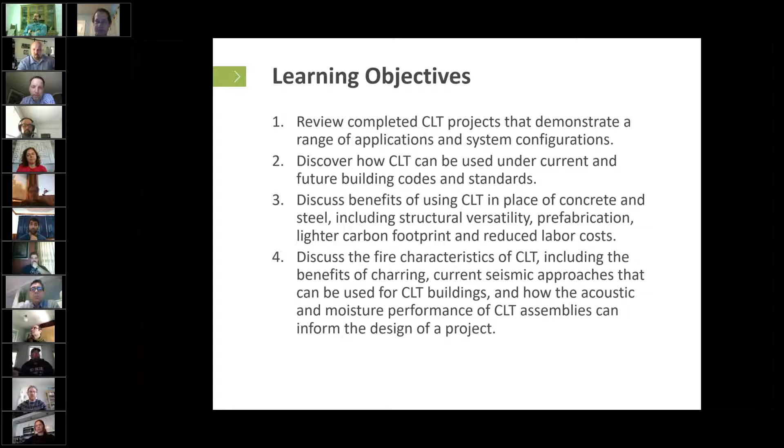So let's jump into our quick outline here. What is cross-laminated timber? But first, backing up, what is mass timber? It's kind of a newer term, really an industry term—you won't find it in the building code until the 2021 IBC. It's similar to traditional heavy timber, except it's smaller dimensional pieces of wood put together to form larger pieces. Here you're seeing two different types of mass timber: glulams, and that floor decking which is actually nail laminated timber. In the code, that's called mechanically laminated timber, which has been in the code for quite some time—used for about 100 years.

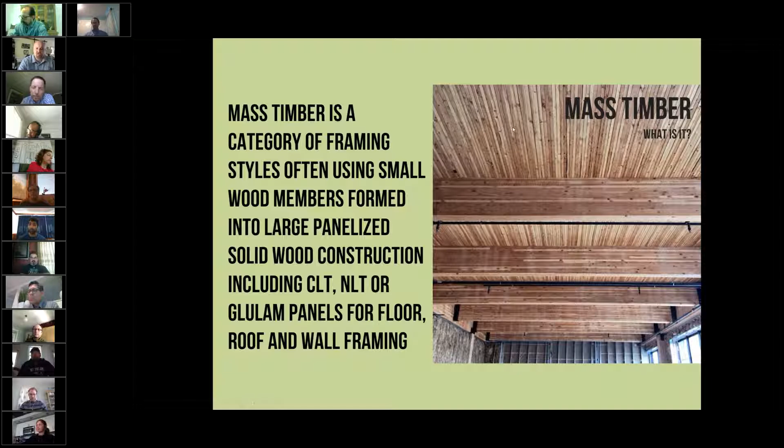Looking at the appeal of mass timber, the primary one far and away is innovation and aesthetics. Most architects come to me because they want to expose the wood, whether it's an office space, which is really common, or university spaces. But that really is the biggest driver.

Construction speed is something that's often overlooked. You save about 25% on your construction time. It's really becoming more popular in an urban setting, so there are a few now in downtown Boston, smaller applications, not very large projects yet.

In New York City, this is about to be put into the code at some point this year, though the current situation may have delayed their code cycle. In New York City, for example, and hopefully Boston too because of high labor costs, there have only been 4 projects that went forward until the fire department and building department put a stop to it because it wasn't specifically in their code.

We're talking about CLT here. Those 4 projects actually came in below a steel frame project because of high labor costs and construction speed. That's not the normal case. It's ironic that New York City consistently comes in lower cost but you can't use it yet. Hopefully that also translates once we see a few mass timber projects in Boston.

Some secondary drivers: it's lightweight. Compared to a concrete building, it's quite a bit lighter. We've seen architects take advantage of this when adding stories to an existing brick building. I'm helping with a couple in New Haven where they were able to get an additional story than they would have otherwise, due to the foundations beneath it, by using mass timber instead of laying brick or masonry and going with a heavier concrete system.

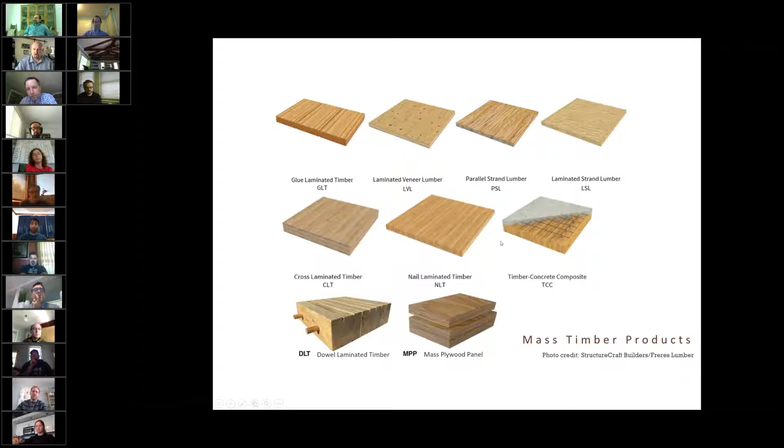So what is cross-laminated timber? It's large wood panels, anywhere between 8 to as much as 64 feet long, made of boards planed down to about 1 3/8 inches, depending on the manufacturer, so they're nice and straight. They lay them perpendicular on glue layers, forming larger panels similar to precast concrete, except lighter, better looking, and more environmentally friendly.

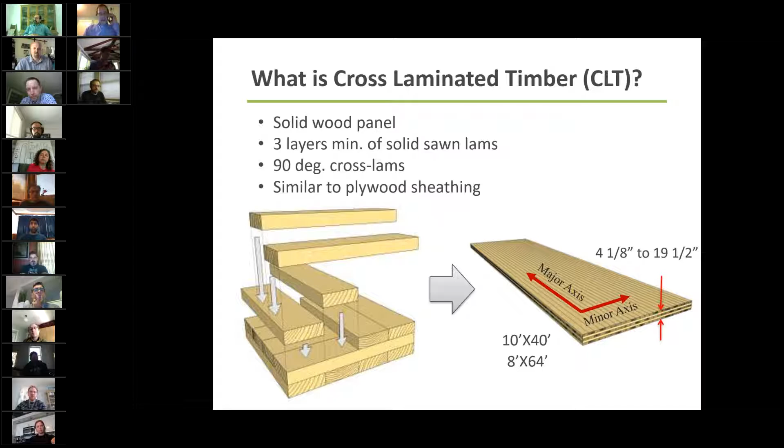Here's a cross section of it. Usually when I do these presentations in person, I bring a CLT or NLT sample, but this is basically a cross section showing an odd number of layers, oriented at 90 degrees to each other.

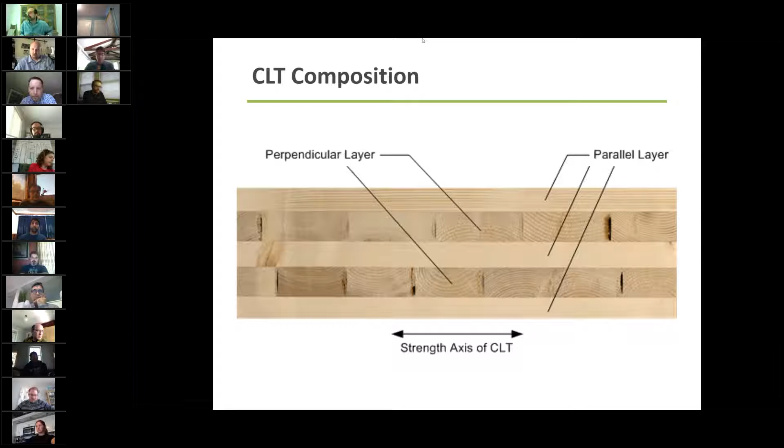It is finger jointed together, so really what that means is, in theory, these could be infinitely long. So really the only limit that you have is shipping. So what can fit in a container?

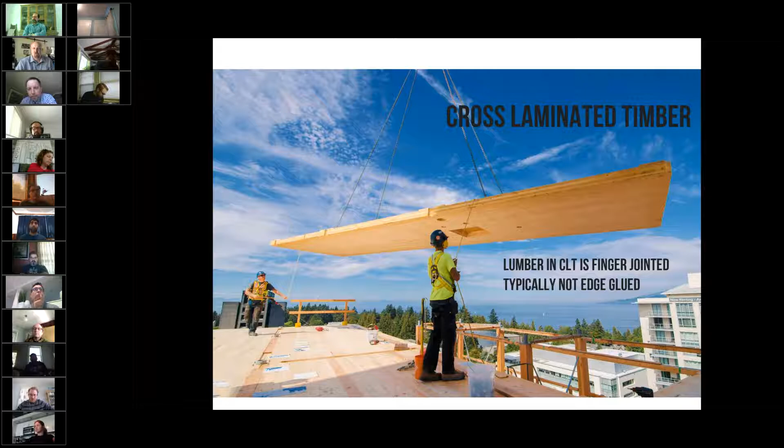Some of these products are shipped from Europe. So what can fit in a shipping container, or if it's more local in the United States or North America, what can fit on a truck as you're trucking it either from the Pacific Northwest or from a plant down south from us, or Nordic, which is the closest to us, north of Montreal.

Your different layups, as you go through the design of a mass timber building, you really want to optimize it. You really want to stay away from 7 and 9 plies. I rarely see a 7-ply go forward. I've seen a 9-ply on one project only.

Really for floors, you want to start with a 5-ply or even a 3-ply, depending on your fire rating requirements. A 5-ply is almost always going to get you over an hour fire rating. 3-ply we've seen on projects where it's 3B construction, where you don't have a fire rating requirement, or 5B construction. If it does require a fire rating, usually you have to shorten your spans a little bit, just to account for the char rate, which I'll get to in a second, which is one of the big topics of exposed timber.

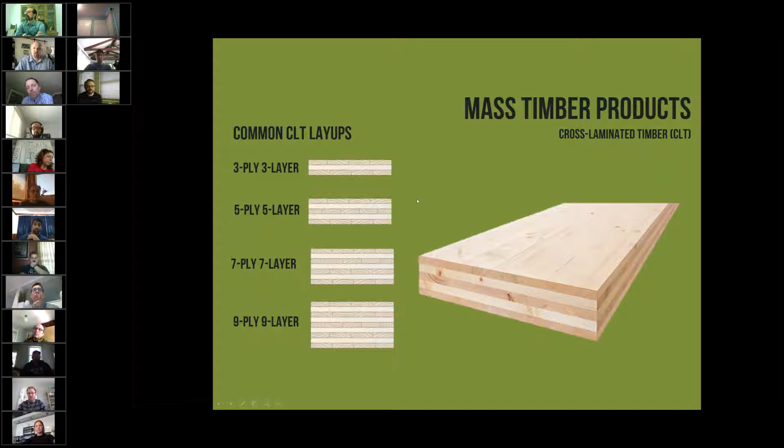This is how it comes together if you're going to use it as walls, although walls are rarely used in CLT. Usually it's a post and beam system due to cost concerns, but also because oftentimes the walls are covered up anyway. So if you're going to use all that wood and cover it up, it doesn't make a whole lot of sense. There are a few projects that do expose walls, but usually that's the driver. If you're going to expose the walls, you can use mass timber. If not, you use something else.

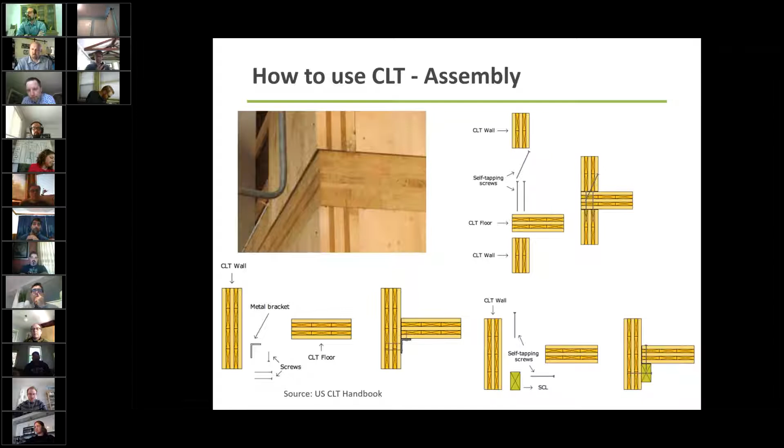So embodied carbon, as I said, that's a big one for state projects and university projects. In the Northeast, there's maybe 15 or a little more projects that are looking at using mass timber for this reason. Some of them have already gone forward.

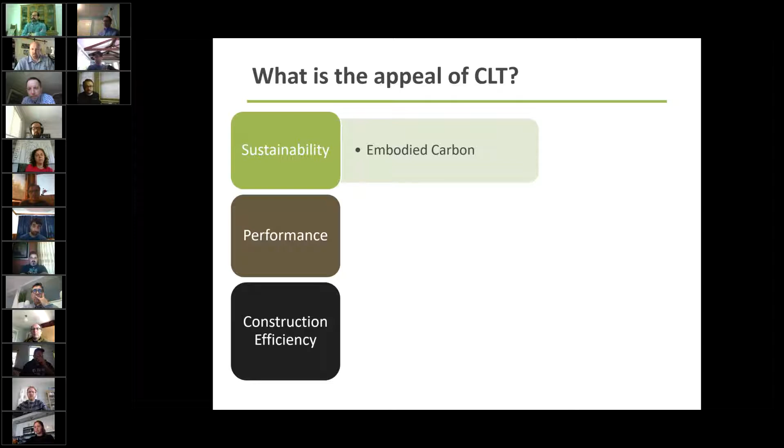We do have a carbon calculator on our website, so if you ever want to compare what the savings are from using even light frame, but also mass timber, which sequesters more carbon, what's the comparison? That's basically what this is, and we convert it so it's easy to understand, to vehicle operation and home operation, just because metric tons of carbon isn't something I can fully wrap my brain around.

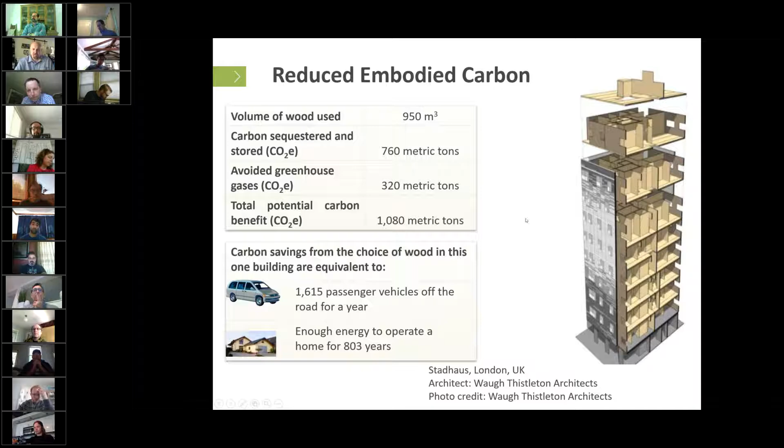That's a free calculator on our website. I'm sure you've heard of this project here, but there's a good story behind this one.

They called up my colleague up in the Pacific Northwest. This was years back, and he ran in there and gave them all the carbon metrics, some of the data behind it. Before you know it, they said, well, we're flipping this thing to wood. It's going to make it easier.

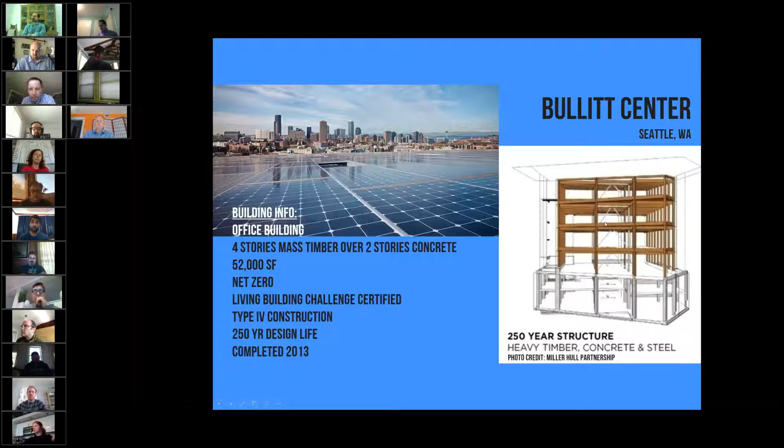And so even though it looks like steel, here's kind of the metrics of the building. Post and beam system, they actually used nail laminated timber. At the time this building went forward, cross laminated timber wasn't really used a whole lot in North America, so they used a different product, nail lam, for this one.

And that's kind of the look that we see a lot of architects and owners going for. The owners are actually able to, in the end, it's not guaranteed, but they typically are able to sell or rent their units out at a faster rate, and also at a little bit higher percentage as well, just because of the exposed look.

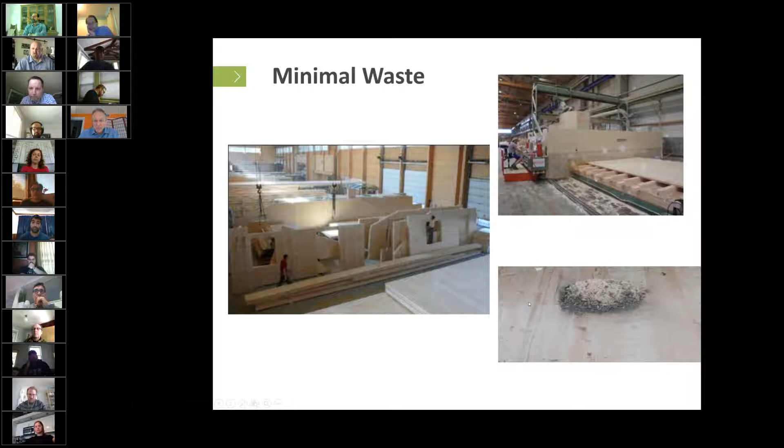There's very minimal waste, so these panels are very efficient. These panels are manufactured in the plant - there's just going to be a bunch of sawdust in the end. You can see you're able to cut openings for windows, or floor openings for mechanical. The image on the right is a project in the Pacific Northwest, on site after they did an entire story. This was basically all the dust they gathered - the waste for an entire week of work that you could just pick up with your hand.

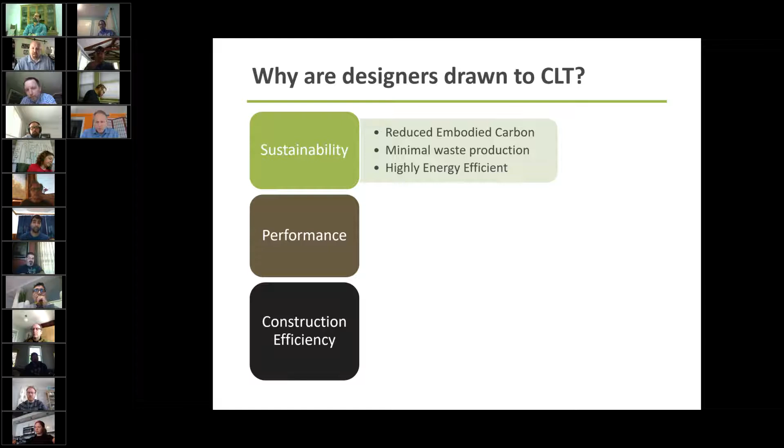Energy operation is really highly energy efficient, particularly if you're using mass timber, usually CLT, in an exterior envelope. Passive house designers are really interested in using CLT for their envelope because it gives you a thermal property, about 1.25 R-value per inch. But more importantly, it gives you a really tight building envelope that you just couldn't get out of a wood building previously. So it's advantageous particularly for passive house designers.

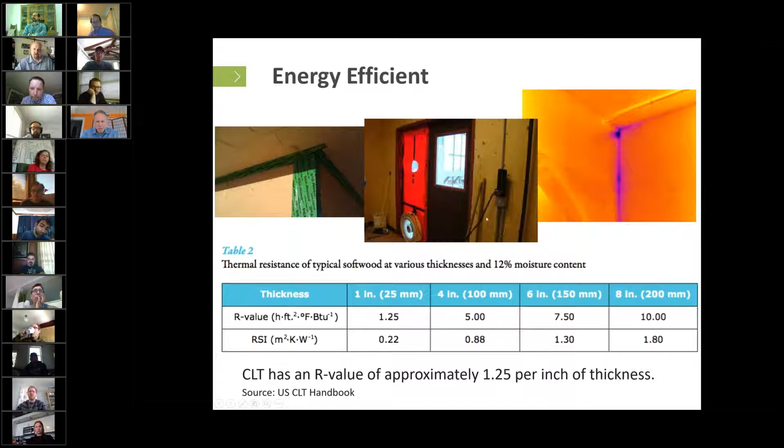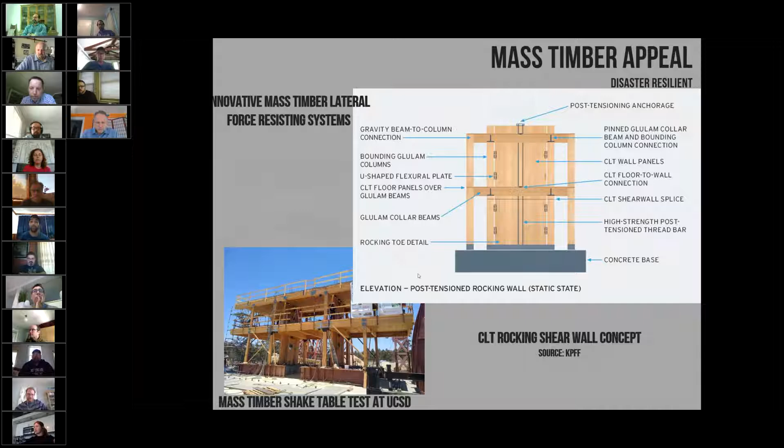And if you do any government buildings, this has also been tested for blast. This was spearheaded from us as a request from the federal government, where they wanted to potentially use wood on projects that had blast resistance.

I've done a number of blast designs out on the West Coast, where I primarily practiced, and the Navy was one of our big clients there. We never used wood - it just wasn't even a possibility. It was typically concrete or masonry. I did one steel blast design, which was a nightmare. Any type of post and beam system is a poor system for blast, because if you pull a column out, you're going to get partial or full collapse. But anyhow, long story short, this was tested for blast.

It's now being used on a few projects on military bases that require blast testing or blast resistance design. This was the first one, done by Lend-Lease, in Alabama - a 4-story Candlewood Suites.

It doesn't look like a timber building - it's all clad in brick. And there it is under construction. Kind of the shame of this building is even on the interior, it doesn't look like a wood building. They covered up 100% of the timber. I think that had more to do with legal issues, where all the Candlewood Suites have to look identical, so they covered everything up, unfortunately.

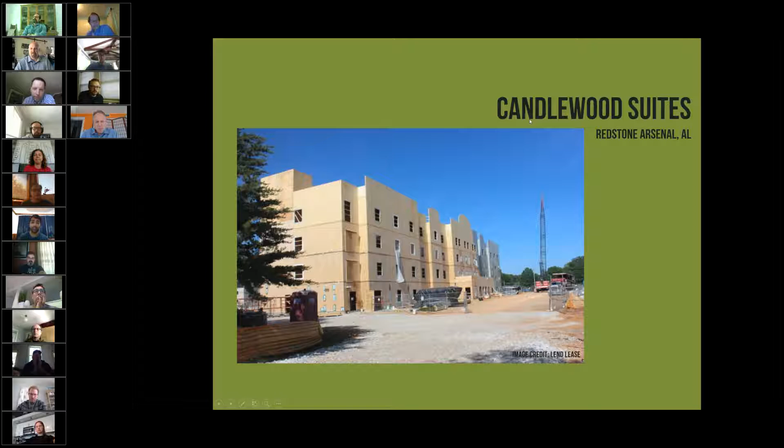I think they may have taken that a little too far, but just some metrics - not that large of a building, 60,000 square feet or so. This one again used CLT in the exterior walls for that blast resistance, that was the whole purpose of it. Lend-Lease is now on their 3rd hotel. Fort Drum, I think there's going to be 2 of them, a little bit closer to us.

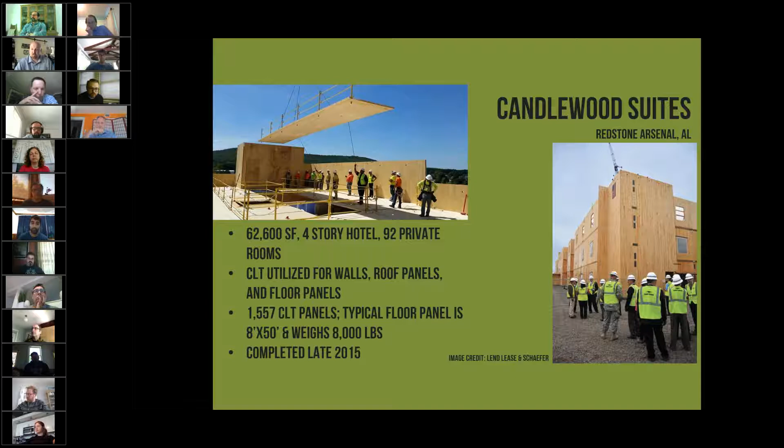Jumping into fire resistance - this is typically the number one topic for timber design, whether it's light framing or mass timber. There are 2 different ways you can go about fire resistance, with exposed wood or even wood encapsulated with gypboard. There are a ton of fire tests - on the left there's just one of many. We have an inventory on our website, under solution papers or something like that, about 4 tabs over. Click down and you'll find a whole host of tests.

Now that actually isn't a code requirement, that's just one way. The IBC actually references the 2015 NDS. Currently, if you're in the 2015 IBC, that's the code path. In chapter 16 of the NDS, the design specification for wood, that's our wood code. Chapter 16 goes through how to achieve up to a 2-hour fire rating with exposed timber, and it's very easy to do - about 3 pages or so of code writing.

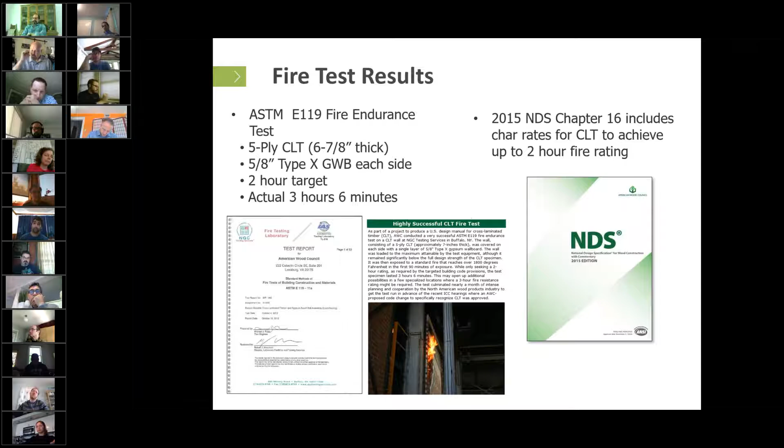The general idea is we understand how timber performs in a fire - it chars at a very predictable rate. Understanding that, we know exactly how much we're going to lose during a really heavy, intense fire. As long as you have enough structure behind that, the char layer insulates the wood, then you're code compliant at that point. This was first included here in 2015, in the IBC.

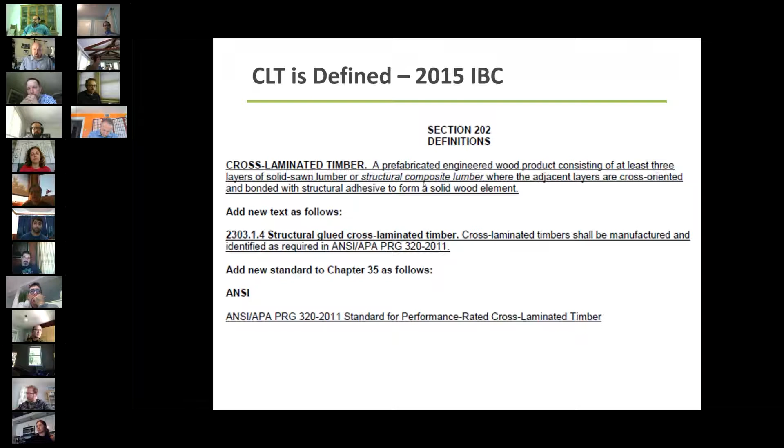Beyond getting the fire ratings, this is actually one of the items that I typically help architects with on mass timber projects: how to classify your building if you're going to do mass timber. Most architects jump right to type 4 and say, hey, I want to do a type 4 building.

The drawback to that is you can't have any concealed spaces unless you get a variance currently. That is changing, but currently if you do a type 4 and you're 100% code compliant, you couldn't have any concealed spaces. This is really modeled on our mill buildings here in New England, brick exterior with interior heavy timber members. You do have the opportunity to use mass timber and heavy timber in types 4, 5, and 3 construction. The advantage of both 5 and 3 is you can have concealed spaces in both of them.

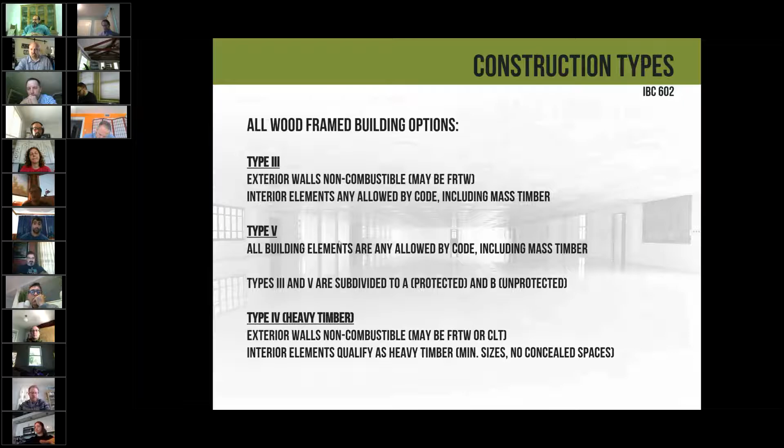Looking at performance of wood, this is a Glulam E119 test. Both beams were unprotected, so there was no gypboard, no fire spray on. You can see when the steel beam buckled, the Glulam actually had about 75% of its strength. So we understand that it performs well in a fire.

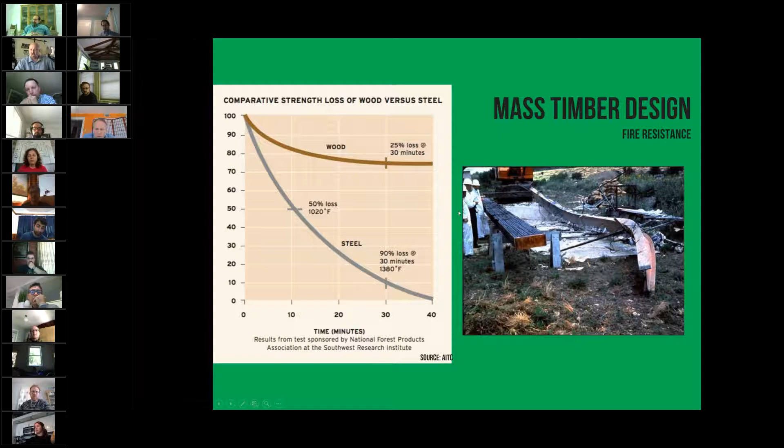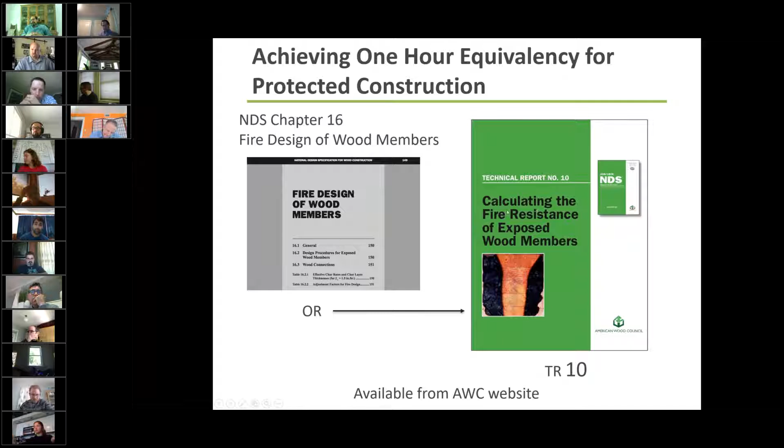This slide was a little out of place, probably should have been two up. This is the code path of the fire resistance I mentioned before. TR10 is a document done by our partner organization, AWC, which goes through calculating the fire resistance. It's a little bit long of a document, but it's there.

Now jumping back to construction types. If you're going to do a building in type 4, this is basically what it is: exterior walls are all non-combustible, or you can use fire retardant treated wood. Cross-laminated timber does not currently come in fire retardant treated wood, but you are permitted to use it in the exterior walls if you add a layer of FRT plywood or a non-combustible layer to the exterior side. You can't have any concealed spaces on the interior, but the advantage of type 4 is the exterior walls where you can use CLT if you want.

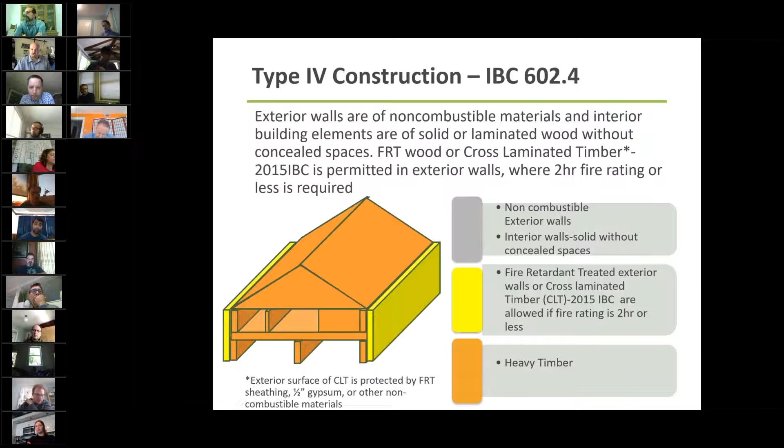You also don't have to calculate fire ratings on the interior. You basically design structurally what you need, and then just check a table in the IBC to make sure you have minimum thicknesses and widths of members for floor beams, floors, roof beams, columns, and roof decking. If you meet or exceed those sizes, you've met the code in terms of fire. The code just understands that heavy and mass timber performs well in a fire, and it's looking at minimum sizes. Most timber structural engineers will still go back and check that, even though it's not required per code. It's just the more experienced ones making sure they have that hour.

This was the concealed spaces issue I've been harping on, where you're not permitted to have it in type 4. This is a huge one architecturally. You can't hide mechanical items, electrical, anything - everything is 100% exposed, provided they don't get a variance.

So there are projects that did get a variance. UMass Design Building is one where they basically had concealed spaces just in certain locations. What they did is they brought sprinklers into the concealed space. Now, technically, that's not in the prescriptive code, but they were able to get a variance for that, and that's the way they went. They could have classified their building as type 3 instead. They just didn't come to me early enough - the whole problem would have gone away.

So what do we do if we don't want to do a type 4 building? We want to have concealed spaces. The easiest thing is if you can do it in types 5B or 3B construction, then you wouldn't have a fire rating requirement for roofs at all. You can have spaces, you're good to go.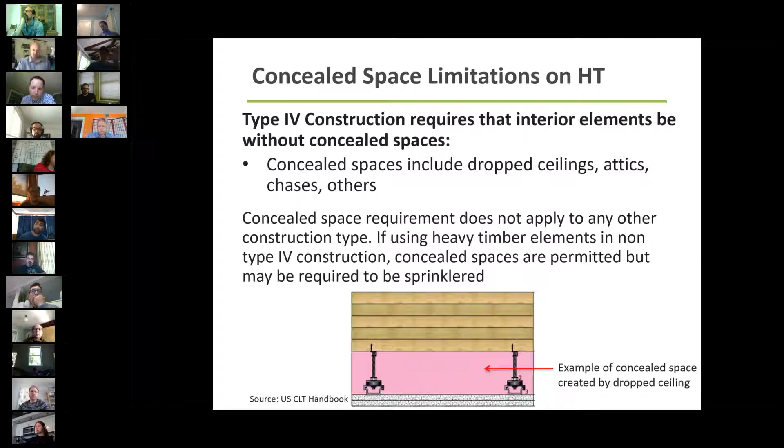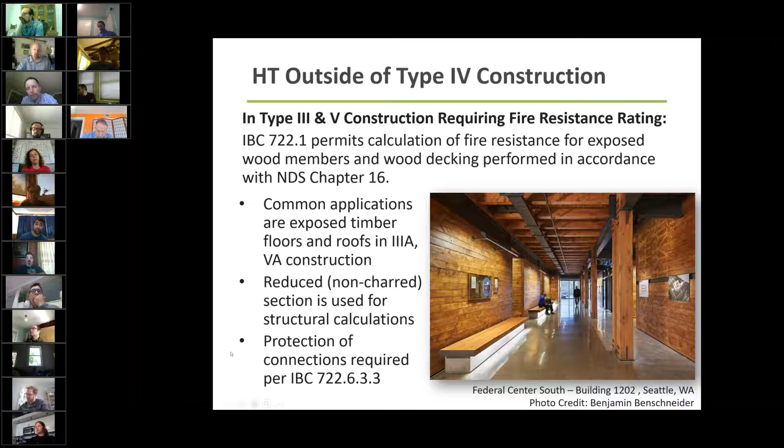Now, what if those construction types don't work due to number of stories or allowable area? You can also do it in types 3A or 5A with concealed spaces, and you simply have to calculate the fire resistance that the timber provides, which is really easy to do, or show testing that it meets and exceeds it. The only disadvantage of type 3A construction is if you want to use CLT in the exterior walls - it is permitted in type 4, but not permitted in type 3 currently, which makes no sense in my mind, but that's what the code is. In type 5, you can use CLT or mass timber anywhere.

So let's jump into acoustics. We have to typically look at acoustics a little bit differently for a mass timber building, because for the most part, we want to expose the undersides of the floors and the roofs. Now, if you don't expose the underside and you have the ability for a drop ceiling, acoustics becomes pretty easy. But 99% of the time, it's not covered up, so we usually have to do something else.

As you can see here, the challenge for STC and IIC is really IIC. So your footfall is only getting you about halfway there from the bare panels. Now, we don't have access to the underside, so we have to do something up above.

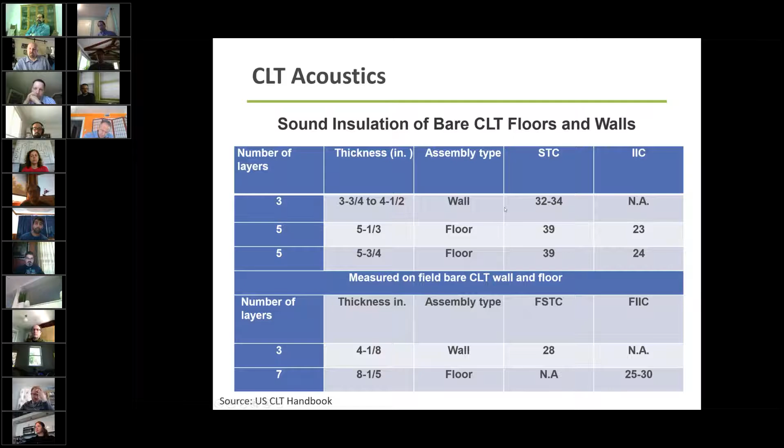This is kind of a common layup, or assembly, that we see. The black element here is typically an Acoustimat, and there's a few companies that make that. Then either an inch and a half or 3 inches of gypcrete or concrete topping, and then whatever flooring you have. When you do all of that, you get an IIC above 50.

Now, AcoustiTECH, the other one is Maxxon. They both have some pretty good interactive tools on their website. So if you're looking at a mass timber building with acoustics, I definitely recommend jumping on their sites. We also have an acoustical paper, or inventory, on our website as well.

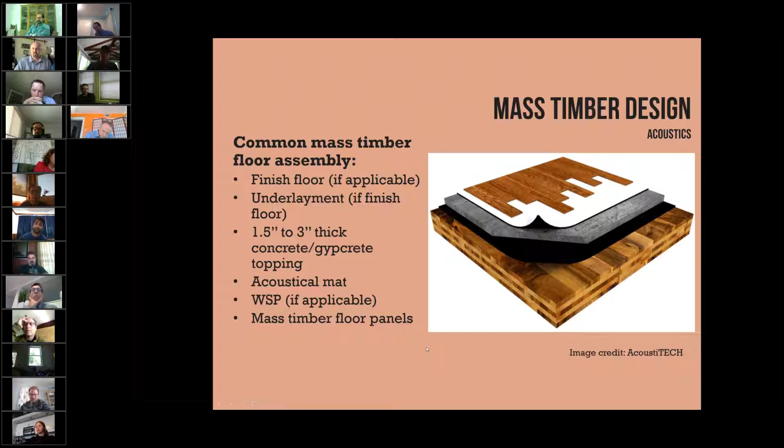So the flexibility of this material really has given us more options where we can use wood, which we typically wouldn't in the past. The project on the left is in Massachusetts that I assisted with. It's a light frame building, and they just didn't want to wait for the masons to put up the shafts. They wanted to get moving quickly. They heard about cross-laminated timber and called me.

I gave them the fire data that I just showed you guys, and a little bit more. Before you know it, they went with the CLT shafts. They got these both up—this is a contractor who had never touched the material before. Now, they probably have touched cast concrete panels, but they got these two shafts up in about 4 hours, and the next day they ran out light framing, as opposed to course per course for masonry, where you have to wait for it to cure, all that fun stuff.

You do get flat plated systems if you want them—that's the two middle images, the bottom and top middle that you're seeing. That's more uncommon to do, but it is possible. On the right, this is the timber composites I was talking about before, where you're connecting the concrete topping to the wood, so it acts similar to a steel beam with studs connecting metal deck and concrete topping. It really stiffens it up.

But this is a project at the University of British Columbia, kind of their signature piece of the building, and they didn't drop columns in here. These are fully cantilevered, wood and concrete composite stairs.

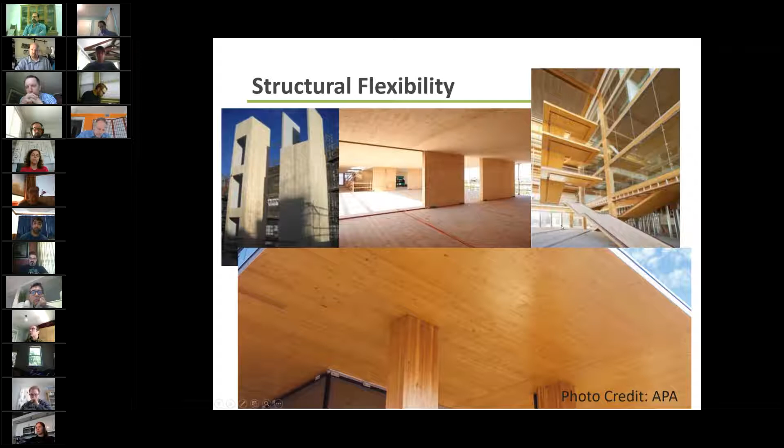So structural flexibility—it is quite a bit lighter. If you're comparing it to a concrete building, it is significantly lighter. Concrete reinforced is about 150 pounds per cubic foot, wood is about 35 pounds per cubic foot. So it is quite a bit lighter.

Because of that, if you're comparing it to like a precast down on the left—if it was precast concrete, it's a lot easier to work with. Your crane size is going to be smaller, your crew size is going to be smaller. It's a safer job site because it is that much lighter.

And some things that oftentimes I didn't even think about myself is it really is a silent job site. As you walk by these—I've been to a number of them now—the only thing you hear usually is a drill, and that's pretty much it. It's honestly like a ghost construction site compared to what we're used to. And because the crews are so small, there isn't a whole lot of yelling, which is common as well.

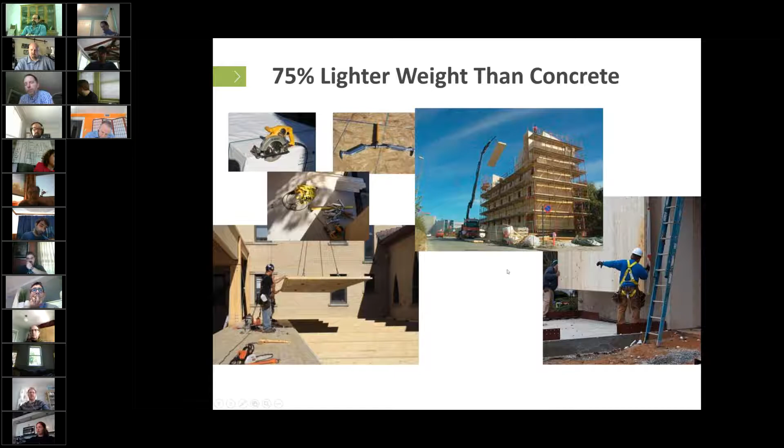Reduced construction time. Generally, you're going to get about a 25% reduction, as much as 30%, depending on building size, in your construction time, and that's the erection of the structure.

This particular project in the bottom left—the one up top is from Europe, so I'll focus on the one from the United States. This was the first elementary school that used mass timber in the United States, and it took them, after they were out of the ground, 8 weeks to construct. That was again with a contractor framer that had no experience with cross-laminated timber.

Really, anyone who's done precast can do cross-laminated timber. It's the same thing.

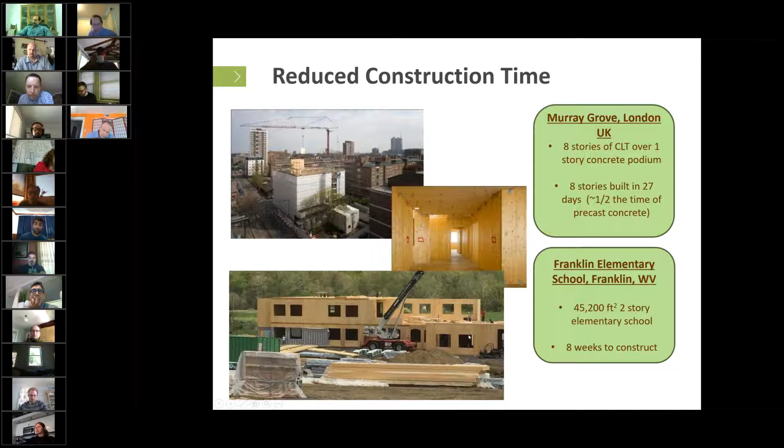There's just a shot of it. You can see it. Again, it doesn't look like a wood building.

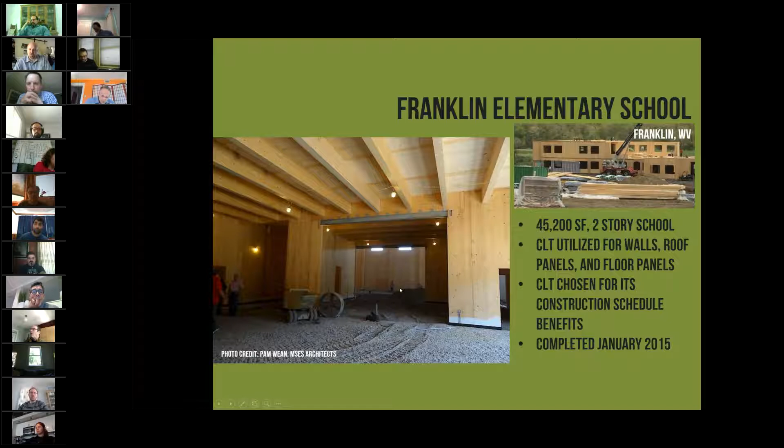It's clad in brick, because they use a lot of brick for their schools down there. On the interior, you can see it's all mass timber, so they did use it for the walls on this project as well. There's their gymnasium, where they exposed some of it, and they have their Acoustamats in the gym.

Visually, you kind of have to cover up some of the wood here. If you didn't, it would look like a barn or a ski lodge or something like that.

It is prefabricated, very precise. This is an image I've already shown, but once you select a manufacturer, you're going to send them a set of plans. Similar to steel, you'll be getting a set of shop drawings. They help you a little bit with layout of the panels, and can sometimes do it more efficiently. So there's that whole shop drawing phase. What we typically hear currently is about 10 to 16 weeks from the time they receive plans to the time you can get panels delivered to the site, so you want to take into account a few months for that whole process.

If you use Glulam, you get quite a bit.

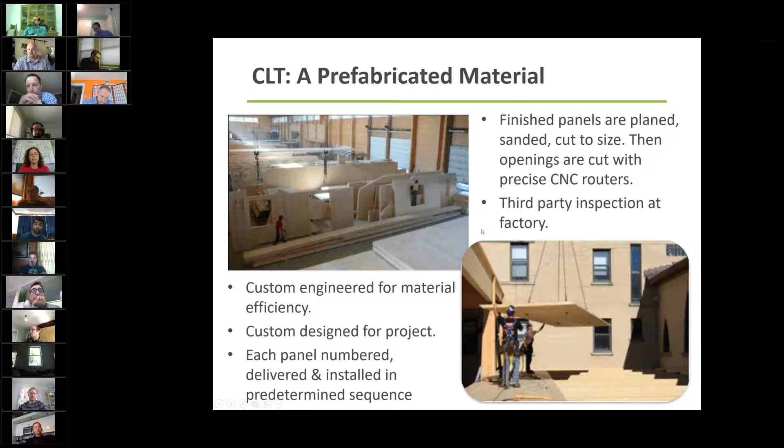Looking at the timeline, it started over 20 years ago, a little more than that actually, and sometime in the mid to late 2000s the interest in North America began. Canada jumped ahead by a few years and got their handbook done in 2011. We were a couple years behind, but pretty quickly we got it into the code. The AWC got this into the 2015 IBC, which was pretty impressive—getting a new material into a code with that speed is really tough to do. The reason they were able to do it, and the reason there are so many fire tests, is that very reason: to get it in the code. So nothing has really been tested more for fire, to my knowledge, than cross-laminated timber. There's just so many tests of it.

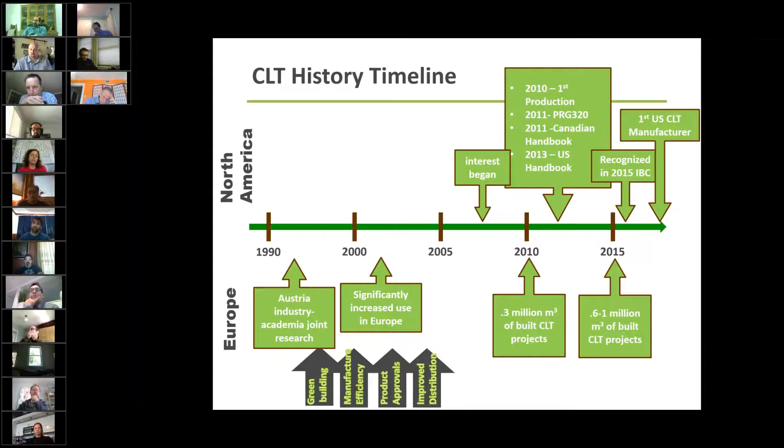So is it readily available? It definitely is. Nordic, up north of Montreal, is in Chibougamau—they have a whole forest there that they source sustainably. They're the closest one to us.

There have been a few expansions—two more that just jumped on the map here, Guardian and Element 5. They're producing CLT more for crane mats, not for buildings, and of course those aren't certified for building use. That would be an alternate methods path, which most folks don't want to go down.

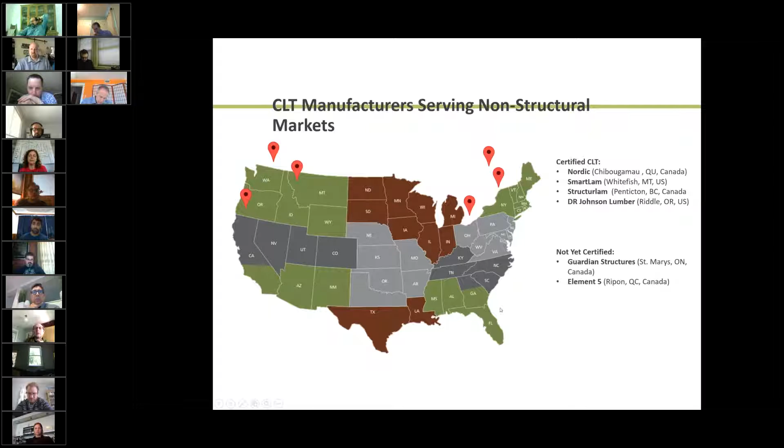Looking at International Beam, down in Alabama—that plant actually just recently got bought out by SmartLam, so that's actually SmartLam now, not International Beam. This slide is a little older. They're up and running, and they use southern yellow pine down there, which is a very strong wood, comparable to Douglas fir, and also black spruce, which is what Nordic uses.

Who else is on here? Katerra is another one—they opened up in Spokane, Washington. Even since then, things changed so quickly. Vaagen is another one in Washington who is also certified. So they're starting to pop up more and more.

The one in Maine—there was another firm that came in but never really got going. They put everything into Alabama instead and basically abandoned Maine for now, though they may come back to it a little later on. So we don't really have one here in New England yet, but hopefully we'll get one soon.

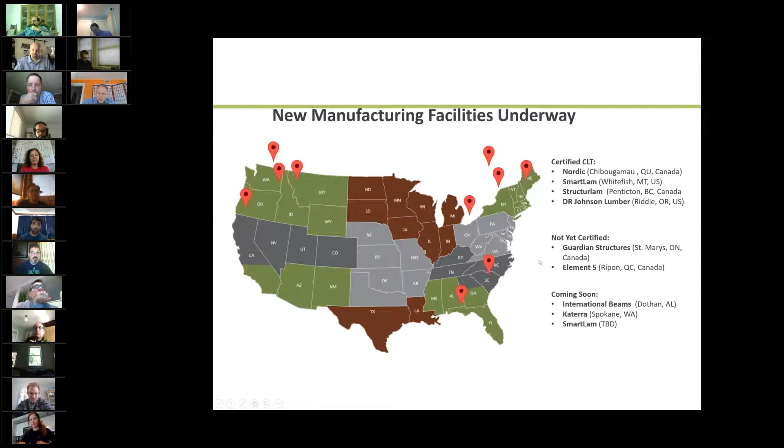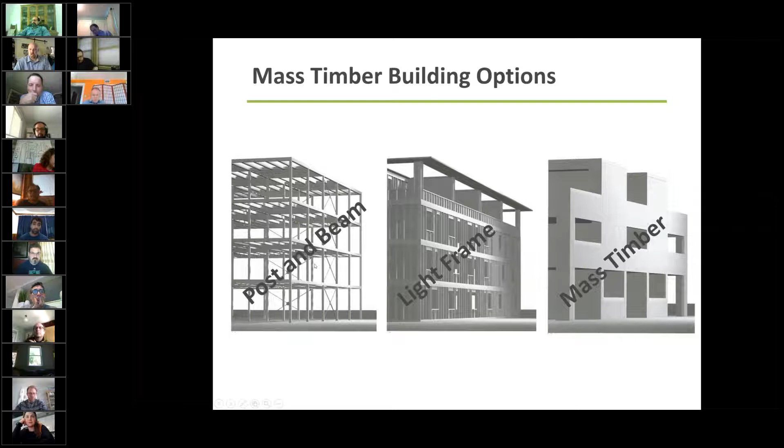Just looking at some project examples: you can do a post and beam system, a hybrid light-framed approach where you cover up the light framing and bring in CLT floor and roof plates, or a full mass timber building like we've seen. The post and beam is far and away the most common, mostly due to economics and also showing the wood off from the exterior at street level. This was a small project that was originally going to be masonry, and they switched it to CLT just to save on really poor foundations.

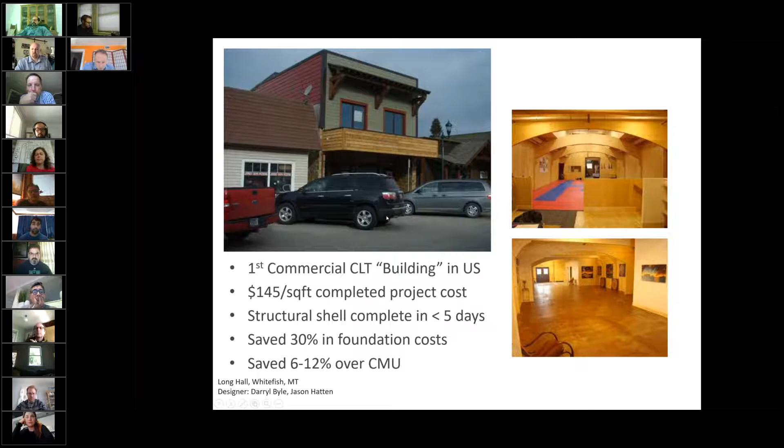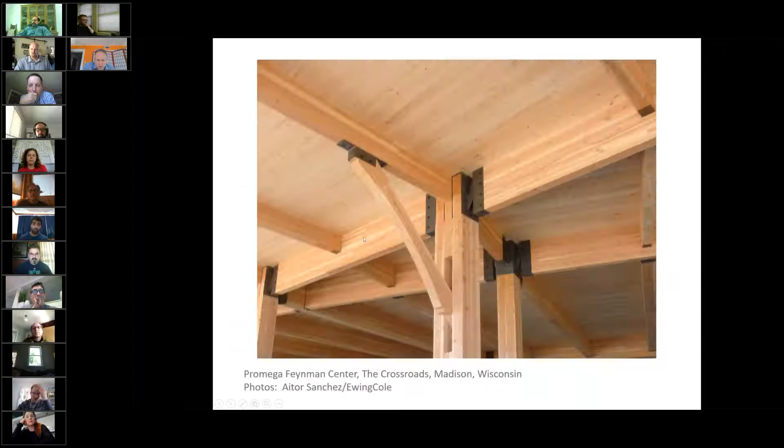This was the one that also had the thermal test I showed earlier in the presentation. It was the first project that used North American cross-laminated timber, and they did it in the roof only—a post and beam system, very common, with CLT only for the roof plates. It has a really nice look to it. That photo was taken during construction.

This is just showing one of these large panels and how efficient it is. You're dropping it down, then someone comes back with a gun and screws the screws right into the glulam, and just moves on to the next panel. So it's really efficient, easy to work with, and very quick.

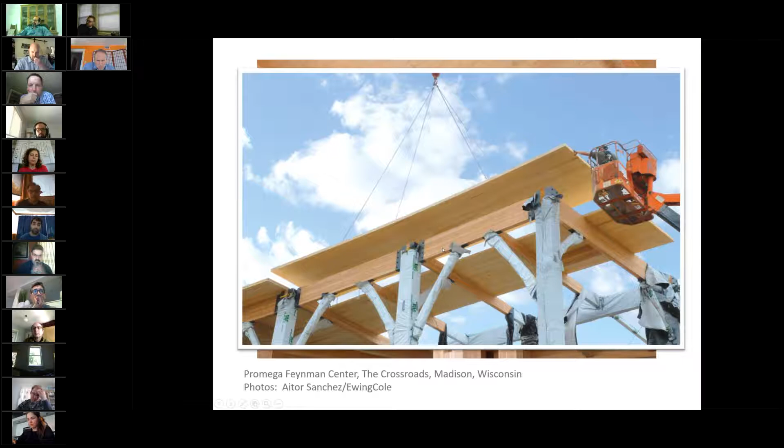And then the final product here - this is the project I showed earlier. They went with a double layer, putting them both in the strong axis in opposite directions because they didn't want any beams, so it's a flat roof plate in Chicago. This was a design competition - the goal was to do a flat wood plated system, and this was Thornton Tomasetti's design that they came up with, and they won it.

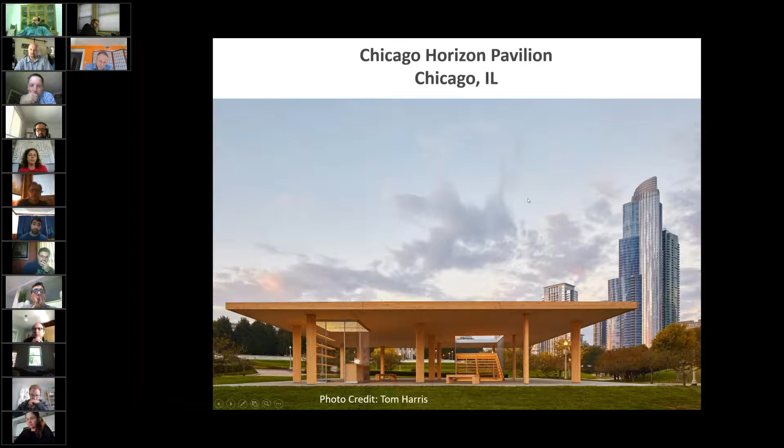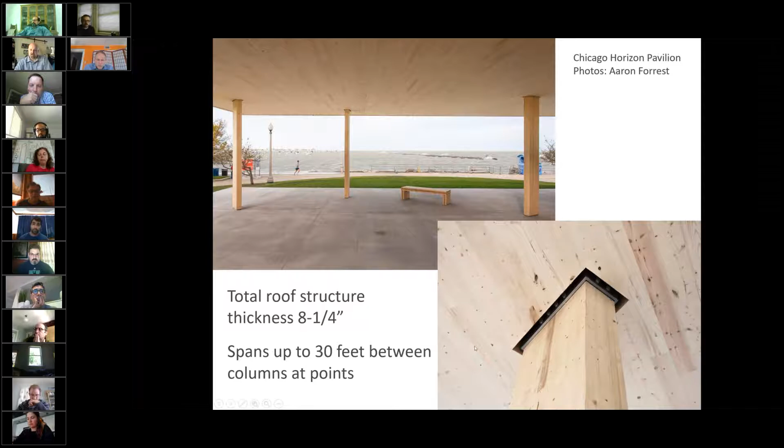So there's two layers of 3-ply, screwed together. The columns actually go up through it, connected to that upper layer, and there's a plate you're not seeing here that's screwing them all together. But it does look nice at night.

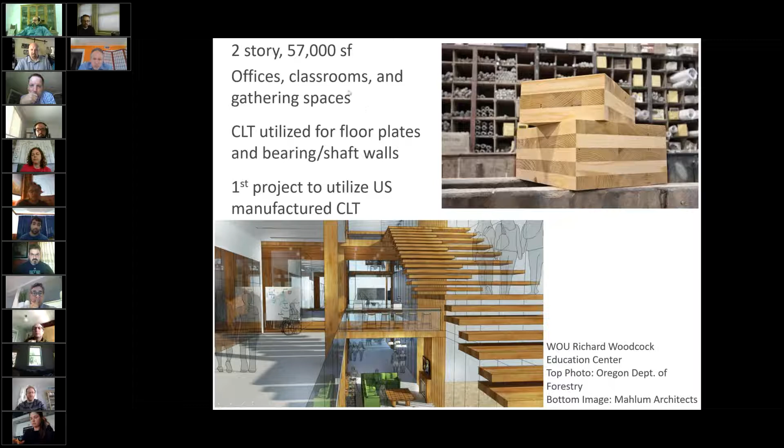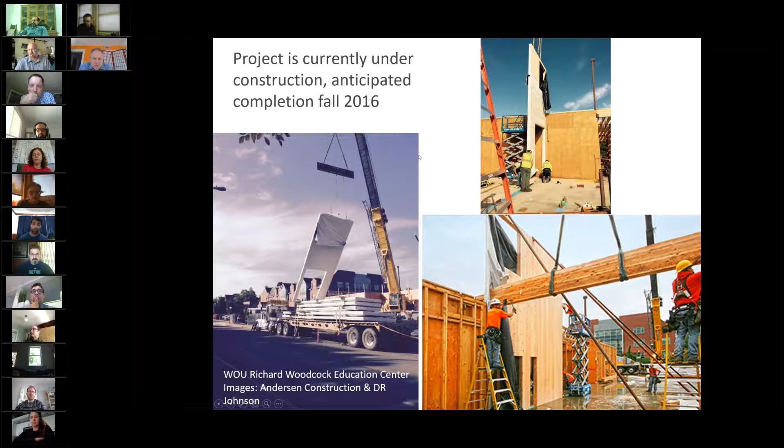This project is an older slide, it was actually already completed. This was one done by D.R. Johnson, so you can see those are Doug fir glulams, and the panels were also Doug fir as well.

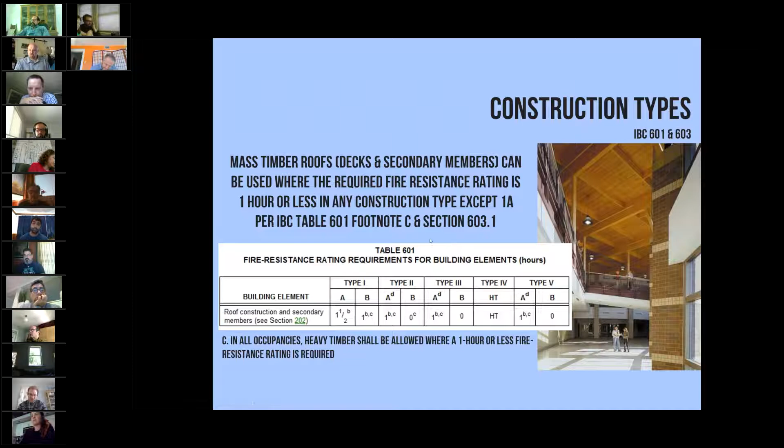Then they exposed it. A little bit closer to us here, this is the Jetport in Portland, Maine. Similarly, this is a type 1B unlimited area building, so it's all conventionally non-combustible. They utilized that footnote, and they used all heavy mass timber for elements.

This particular project used glulam, and they actually used decking on the project. This went forward in 2012 when cross-laminated timber really wasn't available, or they absolutely would have used CLT for this project. DeStafano and Chamberlain have said that to us many times - if CLT was available, it was a no-brainer, because they basically had to put every one of these pieces in one by one on the roof, which is pretty tedious as opposed to dropping a prefab panel down and moving on.

If you ever get a chance to visit this airport, I did once - just be careful about taking photos. You get TSA swarming on you pretty quickly when you do that.

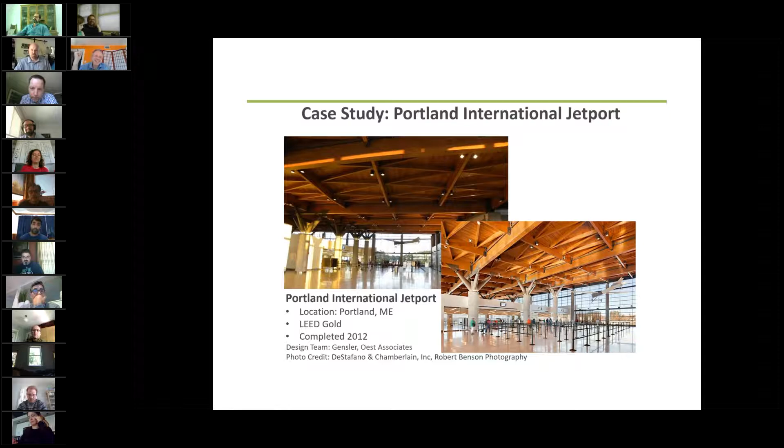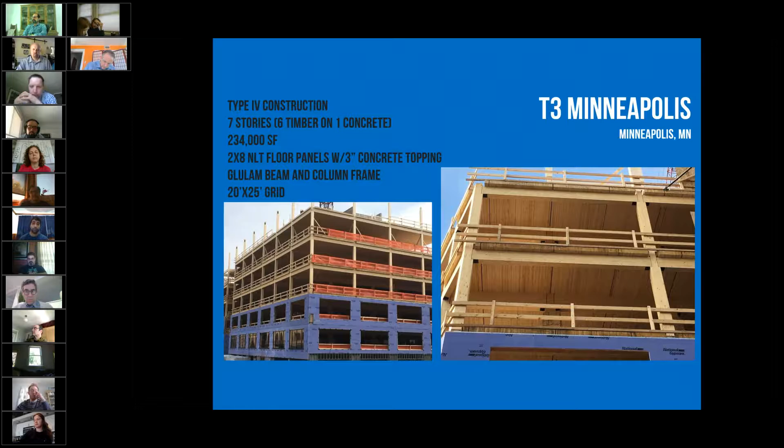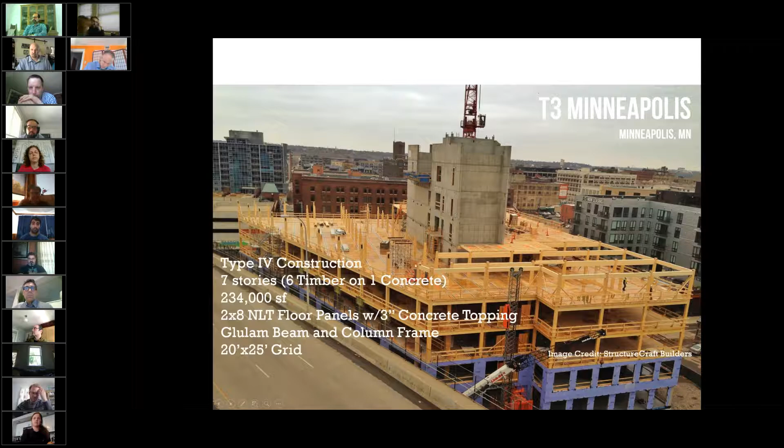Now those other projects have had their stop work order finally lifted after a long process, but this project started about 6, 7, 8 months after the first few CLT ones I helped with, and it finished far before the others due to the New York-specific issues they were having. That's only a New York City issue; outside of it, that's not the case.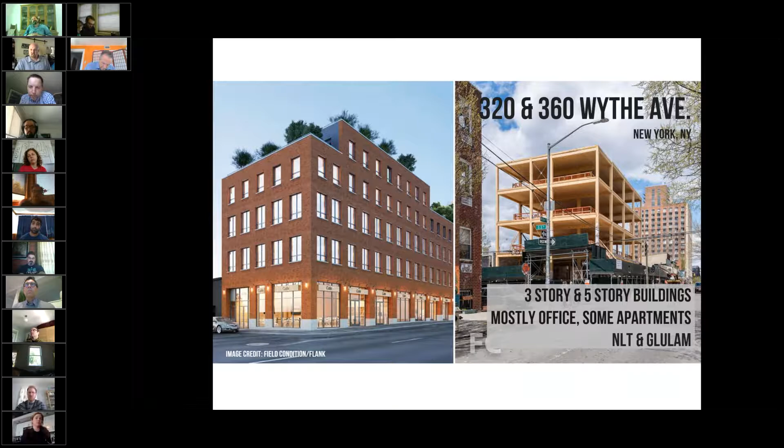I was able to visit this building. I'll have to upload images in the future. They have office spaces on the larger building on the lower floor. Looks really nice as you walk in. In fact, I brought some potential folks who are going to use CLT from the Boston area there, and their jaws drop when they walk through this room. It's really impressive. Up above, it's all residential. It's offices on the lower space only.

So jumping into the code status. The US currently, the 2015 IBC and the 2018, which Massachusetts thankfully is not going to be adopting, is based on an old Heights and Areas Act. It's really based on light framing. It's not based on fire protection systems we have today, design, fire engineering that we have that wasn't available at the time. It's really meant for light frame buildings that were not designed for fire, as well as you can do today. And because of that, you're limited to 6 stories or 85 feet.

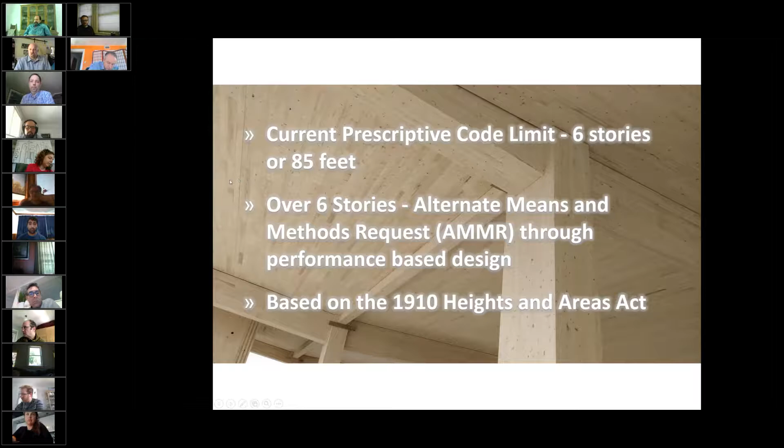We know we can go taller with mass timber than that. It's already being done throughout the world, and also a few in the US as well. So it's nothing new. We used to do this before steel kind of dominated wood. Wood used to be our #1 material. Steel came along, and that became kind of the choice.

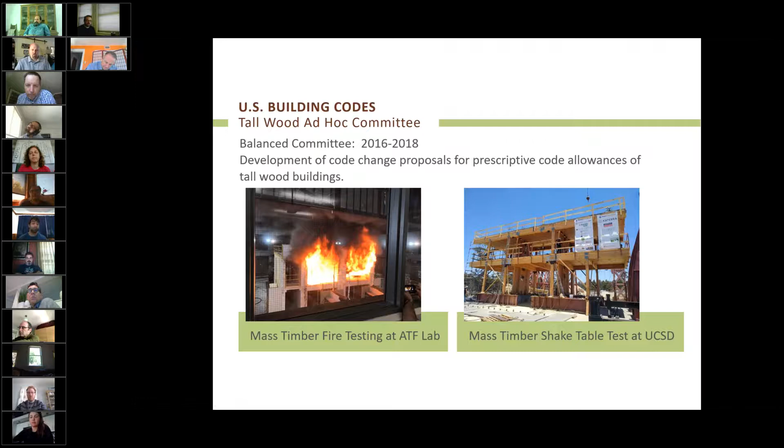And so what did we do? We weren't involved in this effort. Our partner organization, AWC, was, along with fire engineers, architects, code officials, fire officials. And it was a committee that took about a 2-year time frame to say, well, we understand it can be used in tall wood applications. What are we going to do to get it into the building code? And so they did 5 fire tests. We have a whole presentation on the fire tests and the new construction types that are going to be available. I'll run through them quickly here.

One was based on type 4A, which is going to allow 18 stories and 270 feet, fully encapsulated with, I think, two layers of gypboard on all of the timber. And it actually had no sprinkler activation. The fire test's intent was to show that the structure with fire protection can withstand a really intense fire. It was like a 99th percentile. Let the contents burn out and let the structure still be standing. And it performed as predicted. Because of that, that's going to be available to you in the future.

2 tests were done on a maximum 12-story building. One of them was, again, contents burnout, and this was partially encapsulated, so exposing just a percentage of the wood. And again, it performed as predicted. Once the contents burn out, no sprinklers, it basically passed the test. Then they also simulated a test where it was a 23-minute delay. And basically once the sprinklers were on, the fire went out completely. So it performed as predicted.

They did the same thing with 2 more tests, similar to what they did for 4B, with the intent of a 9-story building up to 85 feet. So that really is 8 stories, which doesn't make a lot of sense to me. You can't really fit those stories in there. So they again allowed contents to burn out, and then they also allowed the sprinklers to be delayed by 23 minutes. It performed really well. So these are going to be new construction types that are available to you.

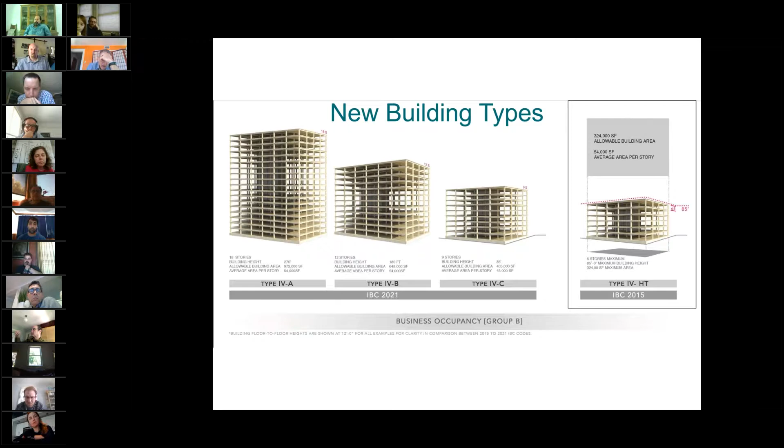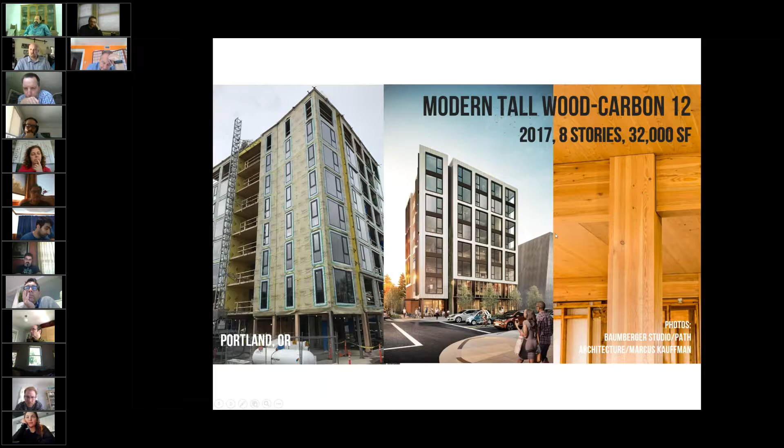So we do have some tall wood modern buildings here. This one's in Portland that went forward before these code changes. This was done in 2017, fully exposed wood. The way that they protected this building is they concealed their connections. That's usually the biggest design challenge for a timber engineer, since your connections need to have a fire rating - but if they do, how are we going to do it? So concealing it is the most common way to do it.

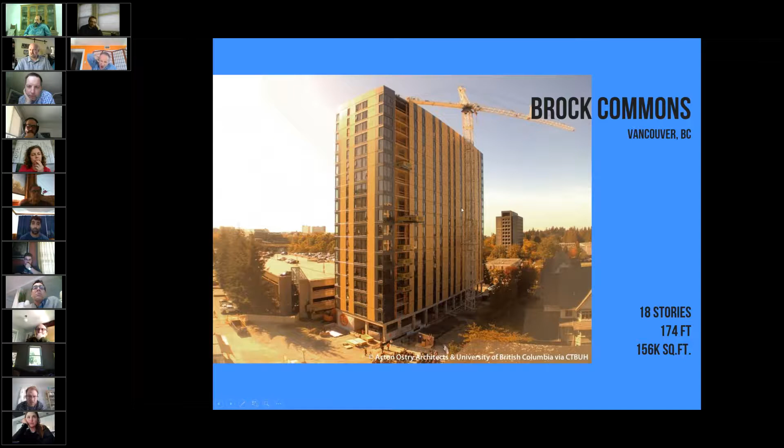So the wood is actually protecting your steel connections. Brock Commons, this is an 18-story timber building, and that's fully encapsulated. They used 3 layers of gypboard. Per design, they only needed 2, but they added a 3rd layer just as an olive branch to the fire officials in that area. This is in British Columbia, a student residence hall, and the speed of construction with this one was pretty amazing. From June 6th to August 10th, just a couple of months after they had the podium up, they had all of the timber up, in a couple of months.

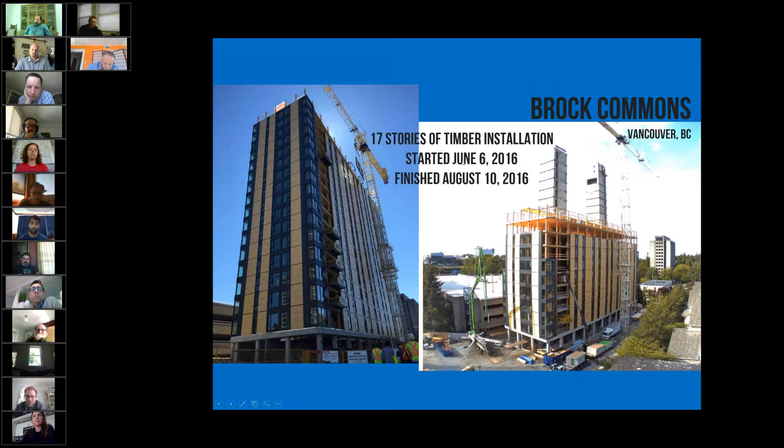It went up actually so quickly that the next trade was incorrectly scheduled out weeks beyond it. So this building just sat dormant, waiting for the next trades to get in. It does go up really quickly.